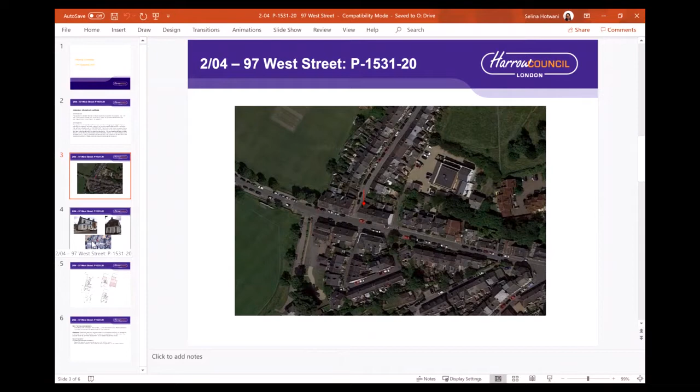So the site is on West Street and is occupied by a 2-storey end of terrace dwelling house on the corner of Nelson Road. The surrounding area is predominantly residential use. The adjacent neighbours are number 95 West Street and 43 Nelson Road to the rear. The site is located within the Harrow on the Hill Village Conservation Area.

The application proposes to convert the property to a 6-bedroom HMO for a maximum of 6 people with internal alterations. No external alterations are proposed.

Objections have been received, however a consultation period is not required as this is for a certificate of lawful development. This assessment is basically regarding whether or not planning permission is required.

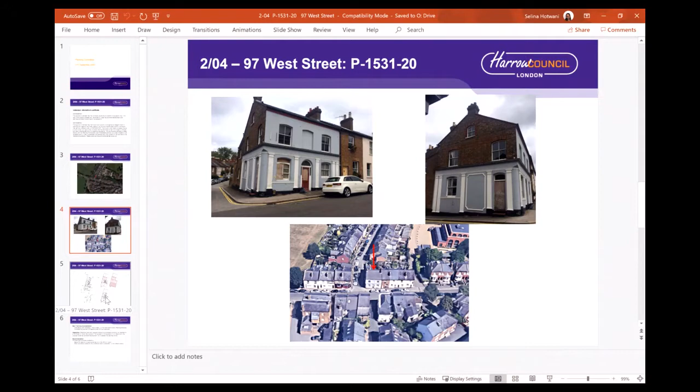Class L permits a change of use from C3 to C4 for up to 6 occupants under Class L of the GPDO, provided the development does not result in the use of the property as 2 or more separate dwelling houses falling within C3. The council are of the opinion that planning permission would not be required for the use of the property as a small HMO for up to 6 people, as the proposal meets the requirements of the legislation under Schedule 2, Part 3, Class L of the Town and Country Planning General Permitted Development Order 2015.

The Planning Committee is therefore asked to agree the reasons for refusal as set out in the officer's report. Thank you very much. Are there any questions?

Chair, just a correction. I don't think our officer meant to say reasons for refusal. Did she not? Shouldn't she have said reasons for grant? Approval, sorry, yes, it was - I mean, it doesn't matter, but just reasons for approval. Sorry.

Good, so if there's no questions - I got one. Sorry, Kasampha, go ahead. Yes, Selina, just a small question.

How many bedrooms are at the moment, and is the family staying there at the moment, or is it an empty property? I'm not aware whether or not there's a family staying there currently. There are 3 bedrooms currently, and 6 bedrooms proposed as part of this proposal.

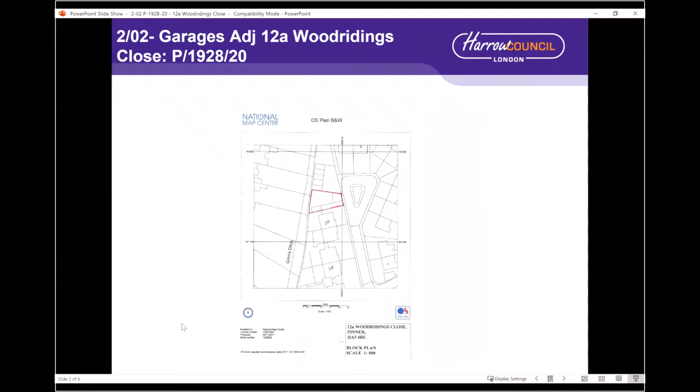Can all members see the screen? We can, yes, lovely. This application relates to 12A Woodridings Close. The application site is a vacant parcel of land between existing flats and 5 lock-up garages situated to the west of Woodridings Close. It's within a cul-de-sac characterised by maisonettes to the west and semi-detached houses to the east.

The site is located on the periphery of the Pinnerwood Park Conservation Area and adjacent to this section of Grims Ditch, designated as a Scheduled Ancient Monument. The proposal seeks construction of a 2-storey building containing 2 one-bedroom flats on a vacant parcel of land. 15 objections have been received following public consultation, addressed in the officer's report in relation to character and appearance, overlooking, loss of views from the conservation area, loss of part of the Scheduled Ancient Monument, parking and trees.

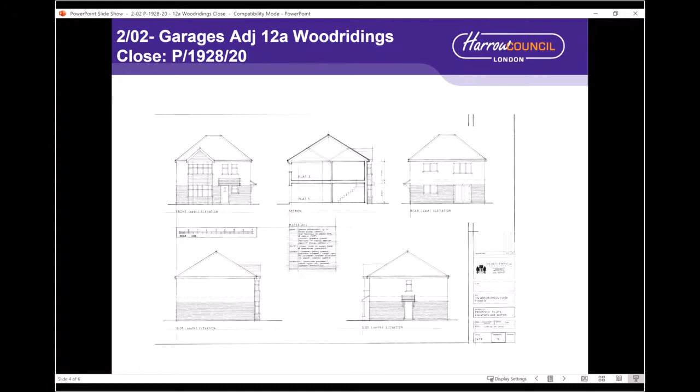In terms of the principle of development, the proposed dwellings would increase smaller housing stock in the borough, complying with housing growth objectives and policies of the Harrow Development Plan. In terms of character and appearance, the proposal has been designed in keeping with surrounding properties and would have an acceptable impact on the character and appearance of the adjoining conservation area, subject to appropriate materials secured by condition. Given the proposal is modest, a watching brief during development to mitigate impact to the archaeological asset during construction has been deemed appropriate, ensuring preservation of the adjoining Scheduled Ancient Monument.

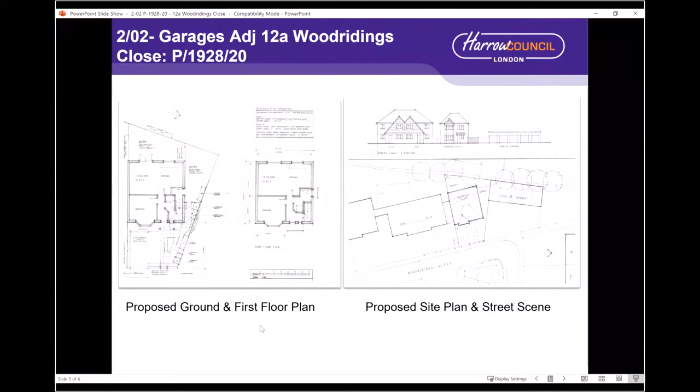In terms of amenity, the proposal would comply with appropriate internal quality of accommodation standards outlined in the London Plan. There are objections regarding overlooking to properties at the rear of Hallam Gardens; however, this will not be significantly different from the prevailing situation given the orientation of the existing property at 12 Woodridings Close and adjoining rear properties on Hallam Gardens, and would therefore not cause detrimental harm to amenity. In all other aspects, the proposal is considered to have an acceptable impact on the residential amenities of adjoining occupiers. In terms of car parking, 1 space is provided off-street.

This complies with current London Plan standards, and highways have no objection. The committee is asked to grant planning permission subject to the conditions outlined in the officer's report. Thank you.

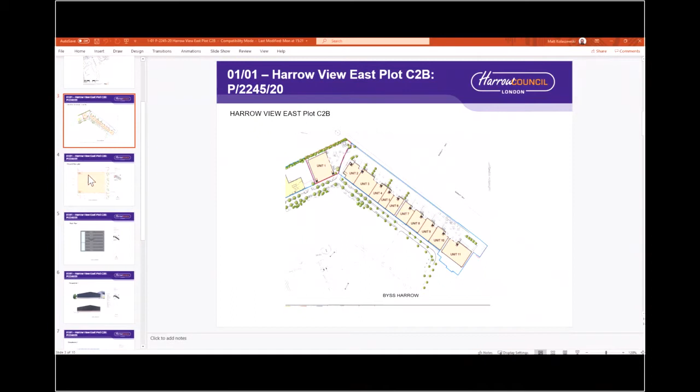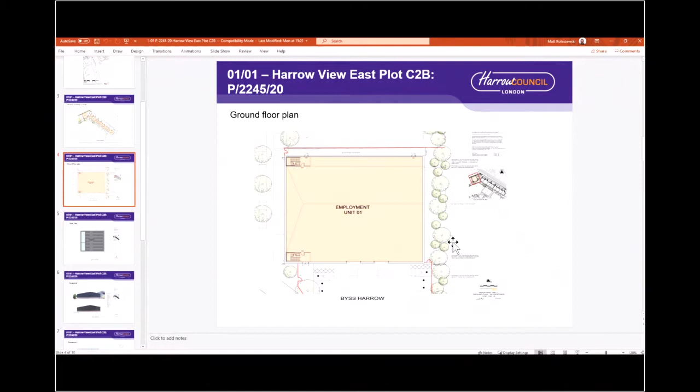I'll take members through the slides. The proposal is the employment unit here. You can see the proposal. This is a ground floor plan, with Magnolia Place to the rear here. This is a roof plan of the proposed building. You have the proposed elevations, front and back, and then the two side elevations.

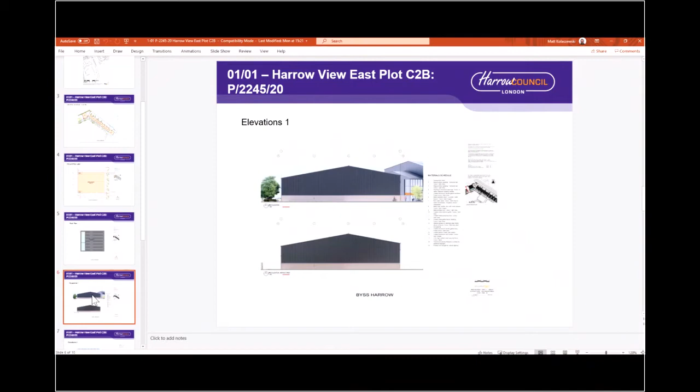The scale of the proposed unit has been chosen to reflect what is anticipated to be most attractive to the type of tenant sought. Originally, it was thought that the design could comply with the approved height parameters of the outline permission, but this would have resulted in a building not suitable to the market.

Notwithstanding, it is only part of the rear pitch of the building that slightly exceeds the approved height parameters. The rear of the roof on Unit 1 will rise to a maximum of 2.9 metres above the 8 metre maximum parameter height. The eaves height, as it adjoins the neighbouring residential gardens, complies with the parameters. The rear of the roof has a shallow pitch and rises gradually, meaning the exceedance gradually rises up to a maximum of 2.9 metres at the pitch of the roof. Given that this pitch rises gradually, there will be no additional visual impact from the residential properties on Magnolia Place.

The external appearance of the building has been designed to respond in a manner that is in keeping with the emerging commercial and residential context of the Harrow View East site.

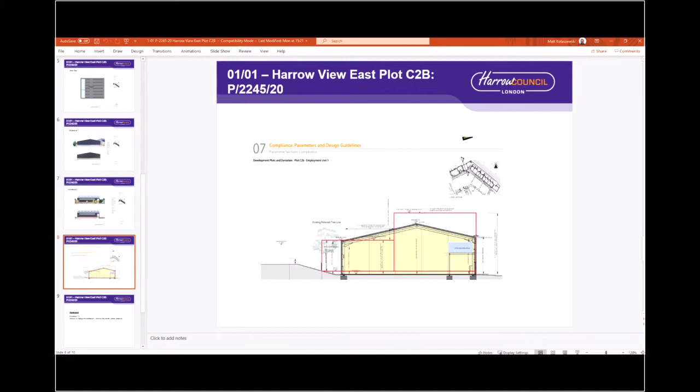In terms of the impact on 9 Magnolia Place, which is the closest residential property to the proposed scheme, the daylight sunlight analysis shows that the proposed scheme has a lower development angle, as you can see from the slide, than the consented maximum parameters at massing and that of the existing buildings pre-demolition. Therefore, the impact on this property compared with the parameter plan will be considerably less.

For the reasons summarised, the application is recommended for approval subject to conditions and a Section 106 agreement. Thank you, Chairman.

I've just got one question. You did bring up the subject of CIL. Yes, all of these industrial units were put in the master plan in order to compensate for the loss of employment that followed the demolition of the Kodak headquarters.

As far as I understand it, CIL is only payable on an increase in floor space. So my question is, has the floor space that was originally occupied by the Kodak building either been subsumed in the Barratt development, or should it be applied to these industrial units?

I believe that in this particular instance, when you take the entire site into context, it has exceeded it, and I believe the floor space has been used up by the Barratt development. So this is an exceedance of circa 1,500 square metres. That's why it is Mayoral CIL liable, which is not Harrow CIL liable. There isn't actually a liability for these uses under the CIL charging schedule for Harrow CIL.

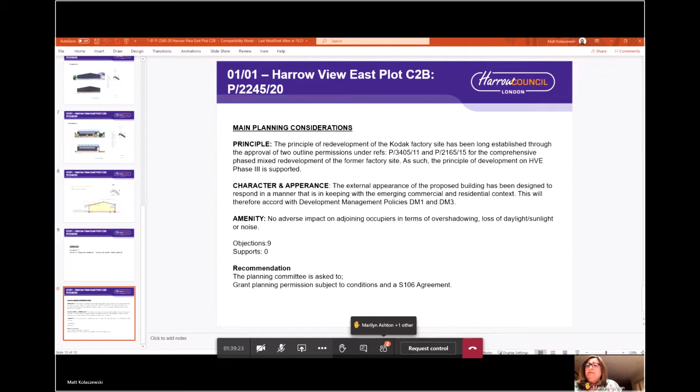Yes, thank you. I've got a simple question. Now, I understand what the building would be, but are there any actual prescriptive hours of use as to how many hours this building can be used for? I might have missed it, so apologies if I have, but I did read the report very thoroughly and I couldn't find it.

I believe that the hours of opening are not in the outline. Let me just double check, bear with me, Councillor. I didn't think they would be. No, because we don't know what the exact use is, absolutely. I'm concerned about that, you see.

I think in terms of the opening hours, we could probably add a condition restricting the hours of use, bearing in mind this is a light industrial use and a B8 storage and distribution use. So we can have appropriate hours as you see fit.

I'd like to propose that we do that to save time. I haven't come up with a definitive number because I'd like some consensus. It would be nice to make a change in this committee.

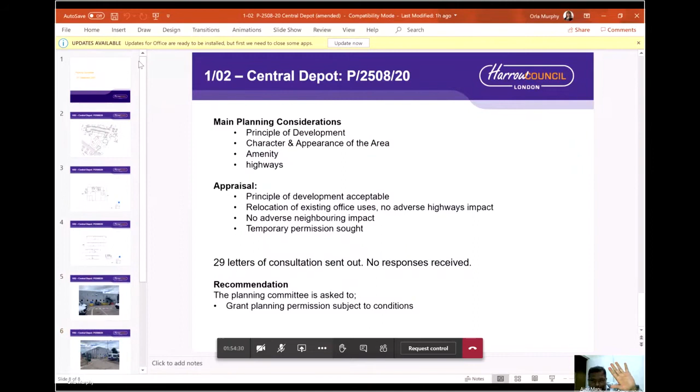My apologies, Chair. I should have declared an interest being a councillor for Kenton West, where the forward drive is. There's a non-pecuniary interest, so I just wanted to put this on the record. Okay, thank you, just because you're a ward councillor.

Thank you, members. May I just confirm that you can see the screen? We can. Thank you. So item 102 relates to the Central Depot in Forward Drive, Harrow. The application before Planning Committee this evening is for an application to retain a temporary modular building for use as 2-storey office accommodation, which basically facilitates the works to the existing accommodation on site.

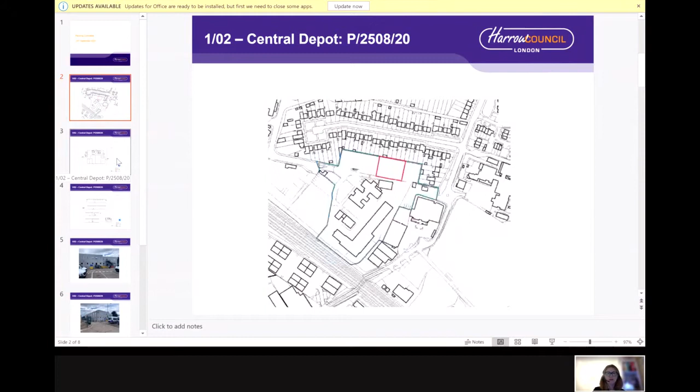The existing site is being redeveloped for new offices and parking, and the existing workforce has been decanted into the building. So the slide in front of you now just shows you the footprint of the building, which is in situ, and the rear gardens of the properties on Cullington Close at the back. There is approximately a 30-metre distance between the building itself and the backs of the houses.

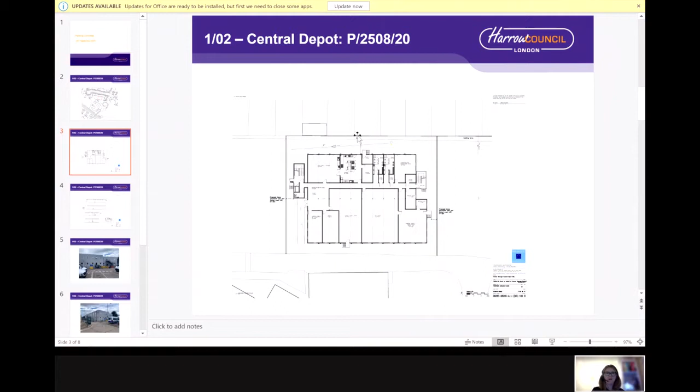The gardens are between 20 to 25 metres long, and there is about a 5-metre gap from the back of the fence to the building itself. The slide here just shows you the extent of the scale. It's 2-storey, and there are some photographs. The application, in terms of its principle, is considered to be acceptable.

It facilitates the relocation of existing office uses, so there are therefore no adverse highways impacts over and above the existing. The building has been in situ for roughly 18 months so far, and permission is sought for a temporary application for an additional 18 months to permit the redevelopment of the site to be completed.

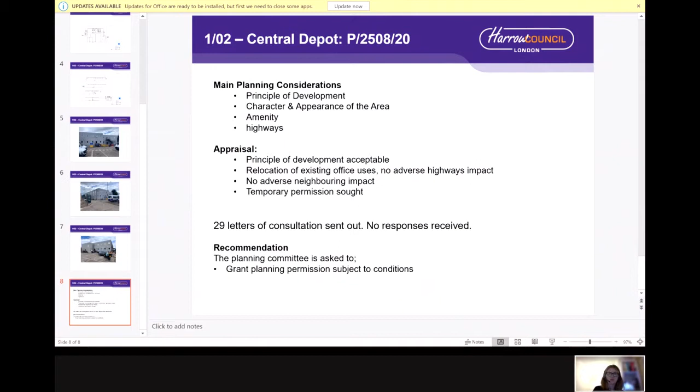We sent out 29 letters of consultation to neighbouring consultees, and we have received no responses to date. The committee is asked to grant planning permission subject to the conditions, including the imposition of a condition that would require this building to be removed after 18 months. I'm happy to take any questions if you have any. Are there any questions? Are there any comments? Christopher.

Thank you, Chair. I believe we had this same building before us at the Planning Committee on the 22nd of July, and I'm slightly concerned, or I want some reassurance, that it will go this far and no further - something temporary given a temporary extension and then another temporary extension, ends up feeling surprisingly permanent. So if we could have some reassurance that A, this is enough time, and B, it will be taken down at the end of that 18 months.

Chair, if I might come in, following a briefing where I gave reassurances, I again spoke to both officers dealing with the depot site to seek reconfirmation that 18 months is the maximum time and there won't be a further extension. I have been reassured that that is the last extension they will be seeking, and 18 months will be it. So you can be reassured on that point.

Thank you, Beverly. You're on mute, Sachin. Right, sorry, I'm getting used to this new machine.

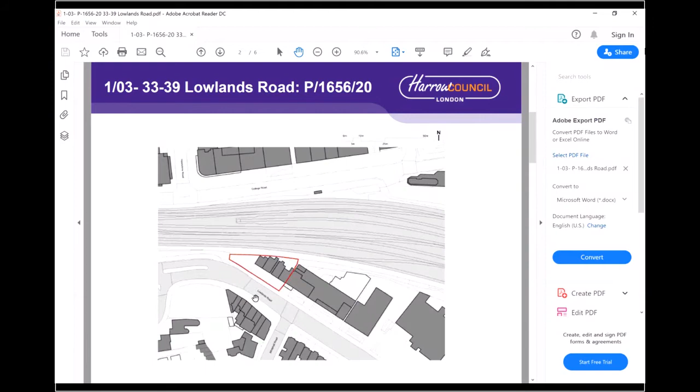So the new London Plan introduced the co-living style of accommodation, and the policy recognises that co-living developments can provide a housing option for single-person households who cannot or choose not to live in self-contained homes or HMOs. There are no national or local policies in relation to this typology, and therefore the assessment is carried out in relation to policy H16 of the Draft London Plan.

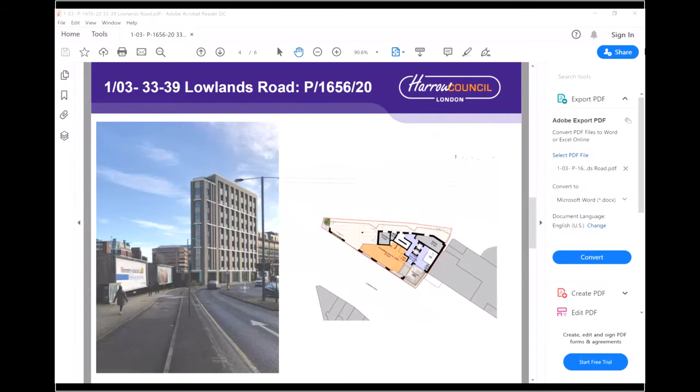The policy specifically states that units should be comfortable and functioning and need not comply with the technical housing standards. The proposal complies with all criteria provided within H16.

Whilst the proposal would result in the loss of 50 square metres of office floor space, there are other planning merits. The proposed accommodation would provide a new form of accommodation which the Mayor of London supports within a sustainable location.

The site is within a transitional town centre location with larger commercial buildings to the north and east of Lowlands Road and lower scale development to the south, with the public highway forming a clear visual break. The building is of an appropriate mass, form and scale, and is of a coherent and contemporary design, which will make a positive contribution to the street scene.

The Conservation Officer and Urban Design Officer raised no objection to the development. The proposed development would provide a good standard of accommodation with access to a variety of communal areas.

The building would be managed, and a laundry service, concierge, etc. would be provided for residents. The type and location of amenity spaces have been designed to facilitate interaction, and overall the internal design quality is high and would provide a good standard of accommodation for future residents.

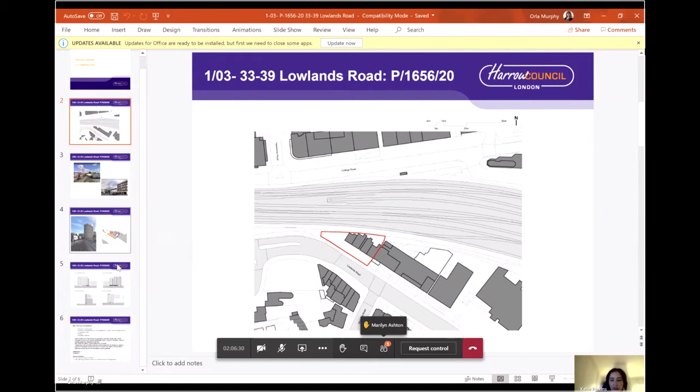The buildings located to the north are approximately 50 metres away with the railway intervening, and the buildings located to the south are 17 metres with Lowlands Road intervening. The building would be 7 storeys high adjacent to the neighbouring 5-storey building and has been designed to ensure it would not encroach a 45-degree splay. The proposal would not have a detrimental impact on residential amenity.

The site has a PTAL rating of 6B and is within walking distance to Harrow and Wealdstone Station and to all the facilities located within the town centre.

The proposal includes the provision of a new access to the north of the site and the provision of 124 cycle spaces and 3 accessible spaces. Highways raised no objection to the development, subject to a Section 106 agreement to ensure it is car free.

With regards to affordable housing, the council appointed a third-party consultant to review the applicant's financial viability report. It was concluded that, subject to some alterations to the applicant's assumptions, including a reduction in build cost, a reduction in operational expenditure, a reduction in the developer's profit margin, and an increase in rents, the scheme would still generate a deficit of nearly £400,000.

The applicant has used our consultant's assumptions to calculate the potential late-stage review contribution using the GLA's methodology. The scheme would generate a surplus profit of approximately £230,000. The GLA's SPG states 60% of any surplus profit is to be shared with the LPA.

This equates to £138,000. However, following negotiation and discussion with the applicant, they initially increased the offer to £350,000, which would be payable upon commencement, and today they have confirmed they would pay an additional £110,000, payable upon first occupation. So the total affordable housing financial contribution would be £460,000.

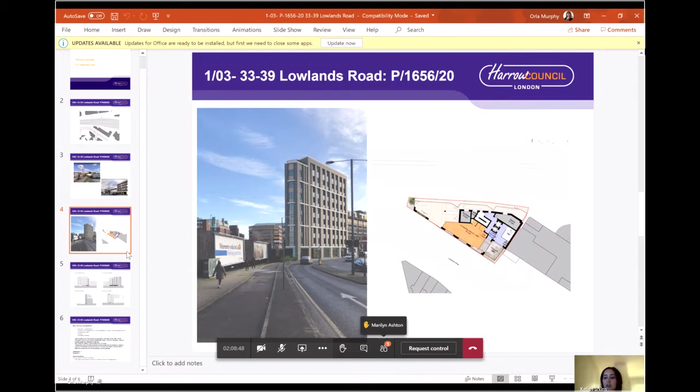So I think I just lost my signal there.

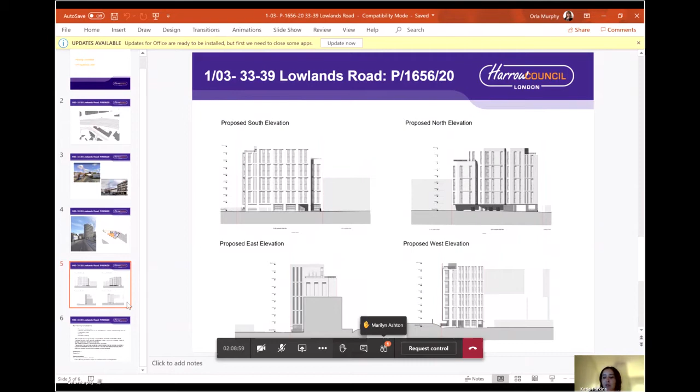Yeah, the proposed development complies with all relevant planning policies and is recommended for grant subject to conditions and a Section 106 agreement. I'm happy to take any questions.

Are there any questions? Marilyn.

Yes, a question, and then if I may, I'd like to make a comment.

On page 87, in section 2, the description of the proposal says it's a 9-storey building, and it says use class sui generis, but it isn't that, is it? And you said it was 7 storeys. Just need a bit of clarification.

So it's 7 storeys adjacent to the neighbouring building, and it steps up to 9 storeys. Ah, so it's 9 storeys high, right? And why does it say sui generis? I mean, if it isn't. It's sui generis. It doesn't fall within a particular use class.

So policy H16 of the draft London plan clearly states that co-living units should not be C3 self-contained dwellings. All right, I understand. Okay, so at our briefing I hadn't quite understood that. I'm grateful, thank you. I have got a comment to make, but I'm happy to wait for the other questions and come back, Chair.

Thank you, Chair. Just a question, not a question, but comments. I think this kind of development will help young professionals and young people working locally, and particularly the nursing staff in Northwick Park Hospital, and it'll be very beneficial to these young professionals, with easy access to London if they're working there. And if somebody's working from home nowadays, it will also be helpful. So I strongly recommend this kind of development in future.

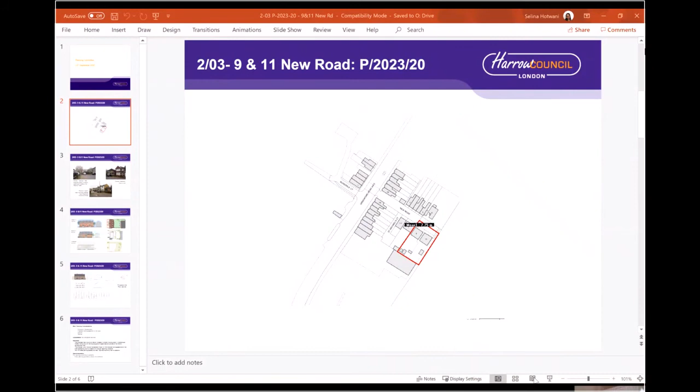Members, can everybody see my screen? Yes. Okay, so this relates to 9 and 11 New Road. The application relates to two properties located on the eastern end of New Road, currently occupied by two two-storey detached properties. The southeastern boundary of the site adjoins Sudbury Hill Playing Field, designated as Metropolitan Open Land within the London Borough of Brent. New Road is a private and unadopted road, accessed via Greenford Road.

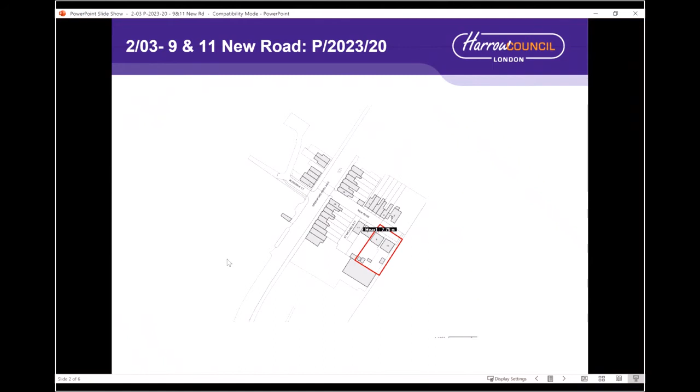It is proposed to demolish the existing detached properties at numbers 9 and 11 New Road and to construct a two-storey building with habitable roof space, consisting of 8 flats. There are 3 relevant planning applications to note at this site. Permission was initially granted for 4 terraced houses with habitable roof space in 2017. Two applications were then recently refused to provide 9 flats, refused on the basis of poor internal quality of accommodation, inadequate refuse storage, poor quality of frontage, and failure to demonstrate highway safety and flow in the site area fronting the site.

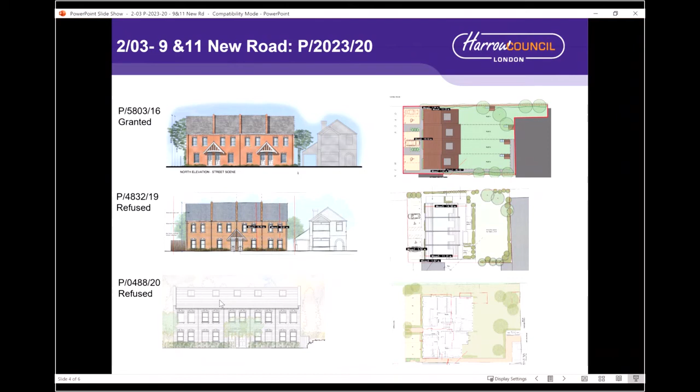The most recent refusal also added poor architectural detailing and design to the refusal reasons. The current application is considered to overcome those reasons for refusal.

In terms of the principle of development, the proposal would contribute to the borough's housing stock. Policy H2 of the draft London Plan supports well-designed new homes on small sites such as this and reinforces the need for small sites to contribute to meeting London's housing needs. Accordingly, both adopted and emergent policies support sites such as this for residential use.

In terms of character and appearance, the size of the proposed building would occupy a similar footprint to the existing detached houses at 9 and 11 New Road and that of the approved scheme. The proposed design is relatively simple within the mixed context of the area, but would provide a robust and cohesive finish to the building subject to appropriate detailing, which will be secured by condition.

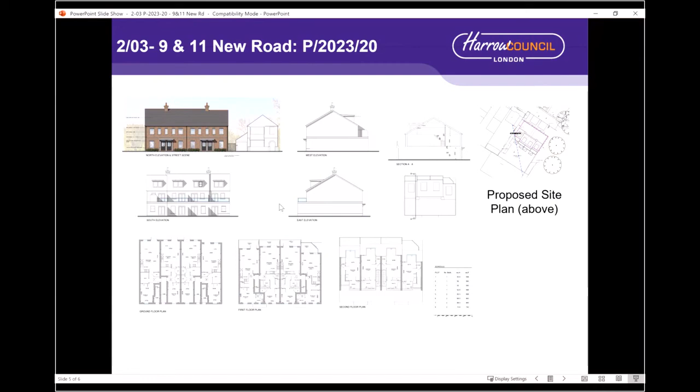The proposal would have an acceptable impact on the character and appearance of the area, addressing previous reasons for refusal regarding character. In terms of amenity, the proposal would meet all London Plan minimum standards and provides a high quality of accommodation.

The proposal would have adequate containment within the site, and although there is a marginal interruption of the 45-degree splay when taken from number 7 New Road, it is considered that the small breach of the 45-degree would not be significant and would result in a satisfactory impact on the occupant of number 7 New Road and would not have a detrimental impact on the residential amenities of the adjoining occupiers.

The proposal is in a PTAL 4 location. Four off-street parking spaces are provided. The Highways Authority has no objection and also considers the level of cycle parking to be adequate. The Planning Committee is asked to grant planning permission subject to conditions. Just to note, there have also been no consultation responses received.

Chair, you're on mute.

Sorry about that. Are there any questions or comments?

Marilyn? Yes, thanks, Chair. Look, this is, for all intents and purposes, other than the fact that it's now a flatted development, more or less the same building as it would have been when it was a terrace house. And on that basis, speaking personally, I think it would have been better if that had been kept that way. But I don't have any difficulty with this.